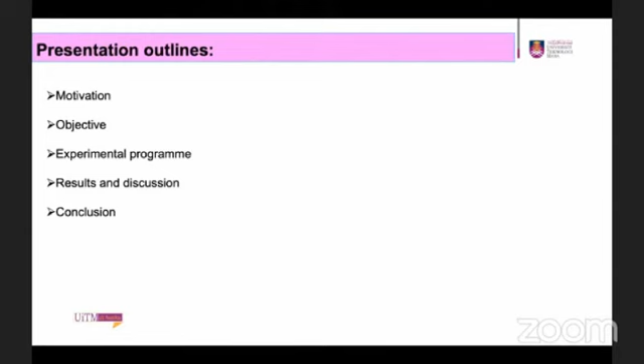Malaysia. Today, I would like to present the topic on the behavior of one hollow interlocking block made from recycled concrete aggregate under flexural loading. This is my presentation outline: the first is motivation, then objective, experimental program, results and discussion, and lastly the conclusion.

As we know, if you refer to construction waste, most of the world's daily solid waste is attributed to the construction industry, with concrete waste making up a significant proportion of this waste. Construction waste increases every year, has a negative impact on the environment and causes social problems in the surrounding communities. And if you refer to Malay Mail 2023, based on this news from February 2023,

the construction waste is estimated to be about 27,068.4 tons, with concrete and aggregate waste accounting for the largest share of 17,820 tons, or 65.8% of the total construction waste generated. It is increasing every year, as 326 tons of construction waste was disposed of in illegal dump sites in Kuala Lumpur alone, which accounted for 94.6% of the total illegal waste generation of 344.3 tons in

the city. Therefore, it is very important to manage and reduce the amount of construction waste generated by adopting sustainable waste management practices such as waste reduction, reuse, and recycling. So in this case, we prefer to reuse the material rather than dispose of it at a dump site, where crushing of concrete waste from construction and demolition waste has proven to be a successful method for obtaining recycled concrete aggregate. This recycled concrete aggregate can be used as a substitute for natural aggregate in the production of new concrete.

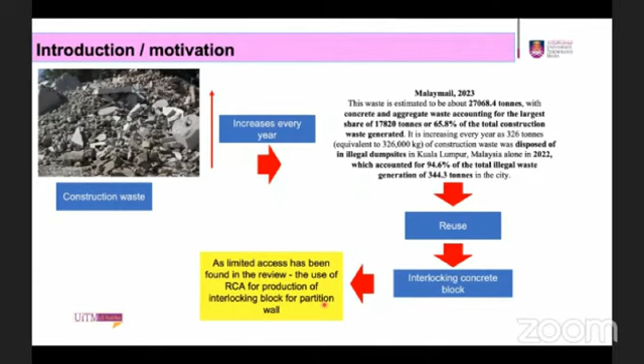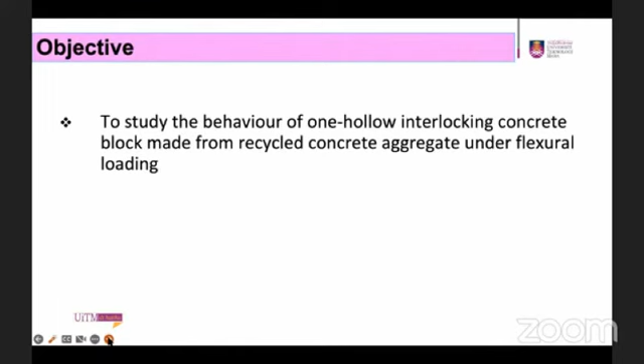As limited reviews were found on the use of recycled concrete aggregate for the production of interlocking concrete blocks, this study investigated the behavior of interlocking concrete blocks made from recycled concrete aggregate and loaded with flexural loading. So this is the main objective of the study: to study the behavior of one hollow interlocking concrete block made from recycled concrete aggregate under flexural loading.

This is the composition of the material, which consists of water, cement, sand or natural fine aggregate, recycled concrete aggregate, and superplasticizer. In this case, we use a water-cement ratio of about 0.65. The mixture of the concrete was based on a ratio of 1:4, 1 for cement and 4 for aggregate. The natural fine aggregate was 50% and recycled aggregate about 50%. And then we added 1% of superplasticizer based on cement weight.

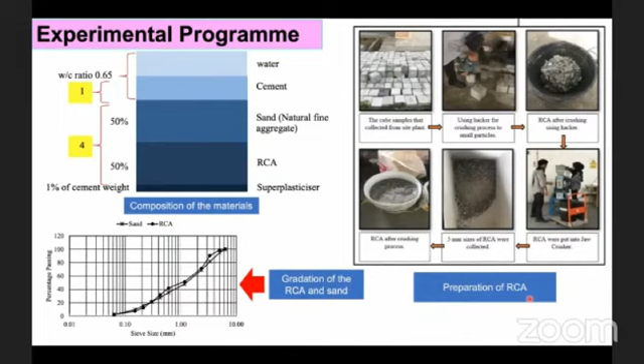And this is the gradation of the recycled concrete aggregate and sand. And this is the preparation of recycled concrete aggregate. In this study, the waste material was tested cubes that we collected from a batching plant, which have the same grade of concrete, 25 to 30 megapascal.

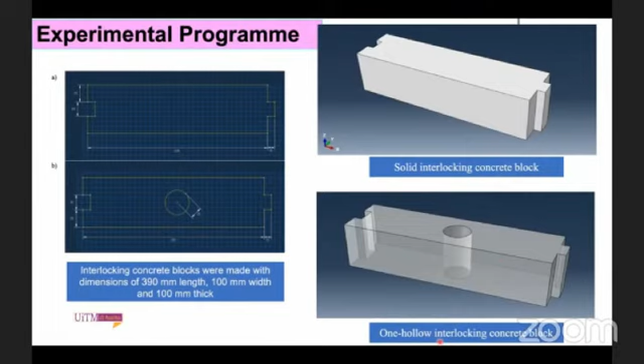So this is the dimension of the interlocking concrete block, with a size of 390 millimeter length, 100 millimeter width, and 100 millimeter thick. The width of the groove is 30 millimeter, and the tongue is also 30 millimeter. The depth of the groove is 15 millimeter, the length of the tongue is 15 millimeter, and the one hollow is located at the center of the interlocking block. This is the 3D view for solid interlocking concrete blocks, and this is the 3D view for one hollow interlocking concrete blocks.

After all ingredients had been thoroughly mixed, the fresh mortar was poured into the formwork and compacted to remove air pockets. The fresh mortar was then left to set for 24 hours, and the formwork was then removed. The cubes and interlocking blocks were then cured for 7, 14, and 28 days in a curing tank filled with water. The samples were cured to keep the mortar moist and prevent cracking. Once the curing process was completed for the specific age of 7, 14, and 28 days, the specimens were tested. This is the formwork for the production of interlocking concrete blocks.

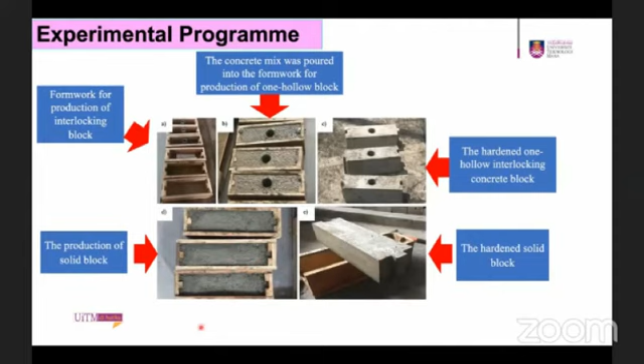And here, the concrete mix was poured into the formwork for production of the one hollow block. And this one is the hardened one hollow interlocking block. This one is the hardened solid block, and this is the production of solid blocks.

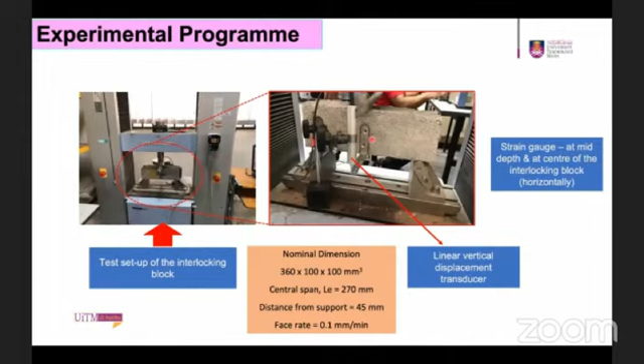Okay, this one is the test setup of the interlocking concrete block. In this study, we put one LVDT, or linear vertical displacement transducer, at the center of this interlocking block, and then the strain gauge was located at the center at the other side of this interlocking block. So the effective length or span from support to another support is 270 millimeter, and this interlocking block was loaded with a rate of 0.1 millimeter per minute.

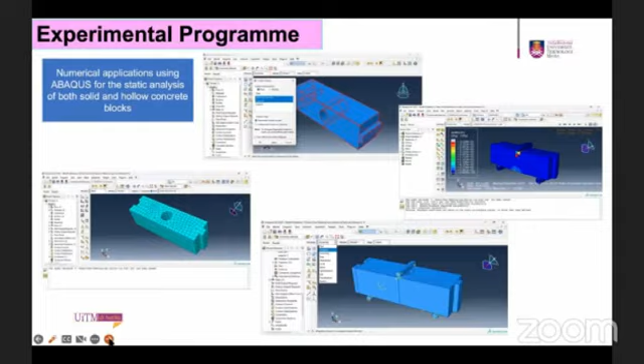Okay, so numerical application using Abaqus for the static analysis of both solid and hollow concrete blocks. And then this one is results and discussion. If you refer to this, this is the result for compressive strength of cubes at 7 days, 14 days, and 28 days. We can see that the compressive strength of the cubes increases as the age increases.

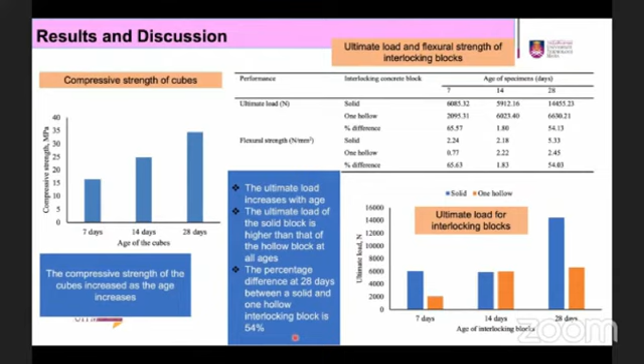And then this one is the result for ultimate load and flexural strength of interlocking block at 7, 14, and 28 days. This one is the graph for ultimate load versus age of interlocking block. From these tables and figure, we can summarize that the ultimate load increases with age, and the ultimate load of the solid block is higher than that of the hollow block at all ages. The percentage difference at 28 days between a solid and one hollow interlocking block is 54%.

And then this one is the result for flexural strength of interlocking block. So the flexural strength increases with age. We have a similar finding for this flexural strength versus age of interlocking block, where the strength of the solid block is higher than that of the hollow block at all ages. The strength of the solid block is 5.33 Newton per square millimeter, and the hollow block is 2.45 Newton per square millimeter at 28 days. Okay, why does this happen?

This is because the void in the middle of the block reduces the ultimate load and the strength of the block. This one is for why flexural strength for the hollow block is lesser than the solid block. The presence of void in the hollow block reduces its overall stiffness and makes it more susceptible to bending under load.

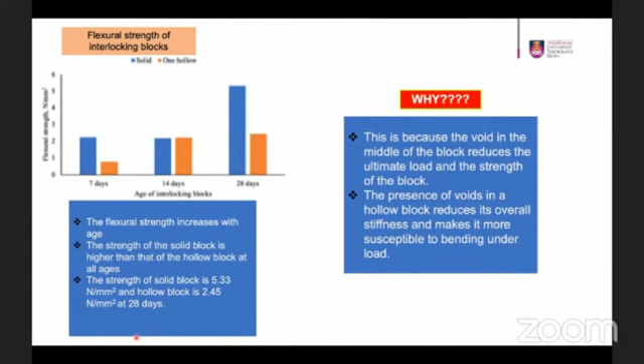So this one is the strain deflection relationship of interlocking block at 7, 14, and 28 days. So this one is the maximum deflection. If you refer to this slide, you can see that the solid block has lesser maximum deflection compared to one hollow. For example, at 7 days for solid, the maximum deflection is 0.048 millimeter, and for one hollow interlocking concrete block it is 0.072 millimeter, with a difference of 50%.

And then at 14 days, for solid it is 0.097 millimeter, and for one hollow it is 0.142 millimeter. The difference at this age is 46%. And then the maximum deflection for solid at 28 days is 0.39 millimeter. One hollow interlocking block is 0.492, with a percentage difference of 26%. Okay, so in this case, the hollow interlocking block is higher than that of the solid interlocking block.

This phenomenon indicates that the maximum deflection is due to the bending or sagging of the interlocking block under load, which is influenced by a variety of factors, such as the material properties, geometry, and boundary condition of the blocks.

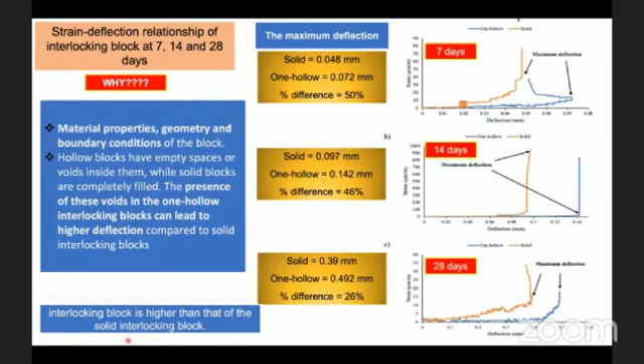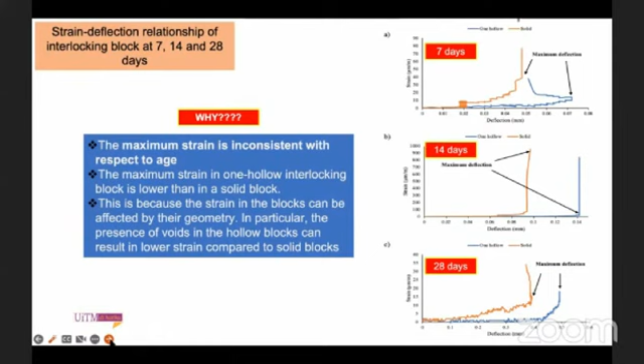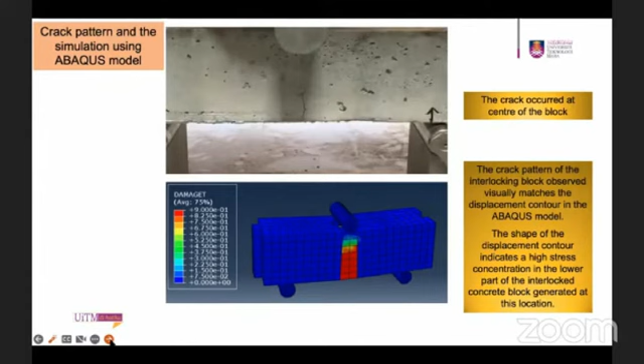Okay, this one is the result for strain deflection relationship of interlocking block at 7, 14, and 28 days. And we found out that the maximum strain is inconsistent with respect to age. And the maximum strain in one hollow interlocking block is lower than that in a solid block. And this one is the crack pattern and the simulation using the Abaqus model, where the crack pattern of the interlocking block observed visually matches with the displacement contour in the Abaqus model.

In conclusion, the compressive strength of the cube made from 50% RCA and 50% sand increases as the cube age increases, with the maximum strength of 34.54 megapascal at 28 days. And then the flexural strength of the solid block and the hollow block with 50% RCA at 28 days is higher than at 7 and 14 days. And then the deflection of one hollow interlocking block is higher than that of the solid block, with a difference of 26%.

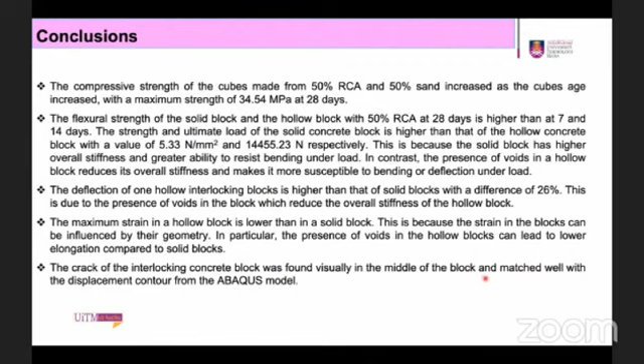The maximum strain in the hollow block is lower than the solid block, and then the crack of the interlocking concrete block was found visually in the middle of the block and matched well with the displacement contour from the Abaqus model. Thank you. Thank you very much.